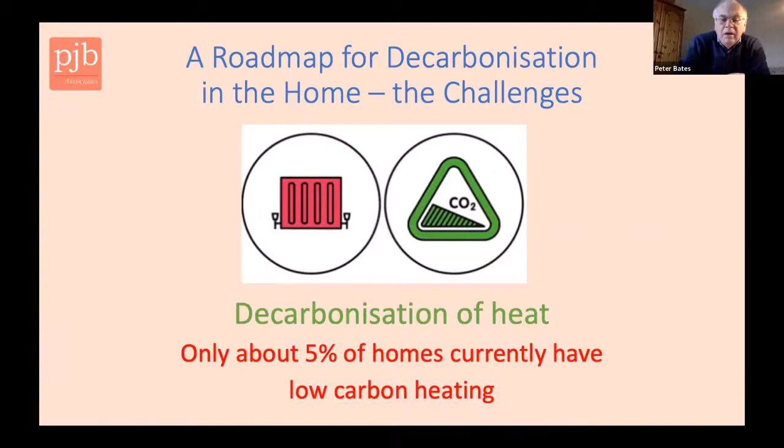So if I can introduce the topic of today, which is all about how we can decarbonise the home in terms of heating, because currently we only have about 5% of homes that actually have low carbon heating.

I've had a 30-year-old boiler and I want to decarbonise my home, and I still haven't as yet found the ideal solution to do that in my 3-bedroom semi-detached property, which some of you probably would have seen when I used it as a case study in previous events, which, by the way, have been recorded and are available on the Cleantech website.

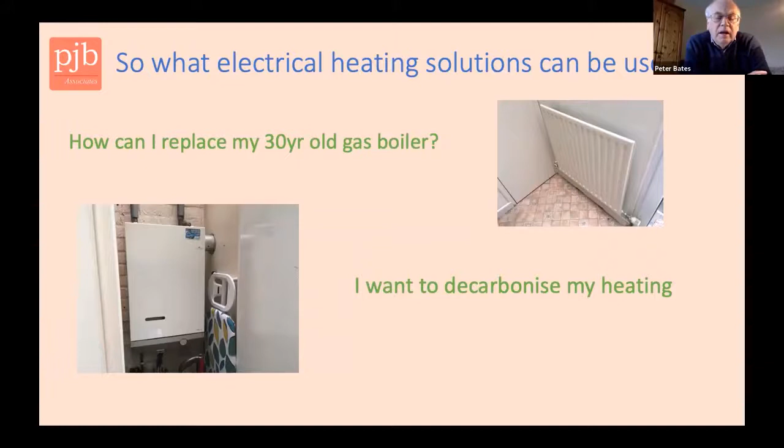We've still got something like 85% of heating through gas heating, particularly in the wintertime. And that's a big issue which does need to be addressed.

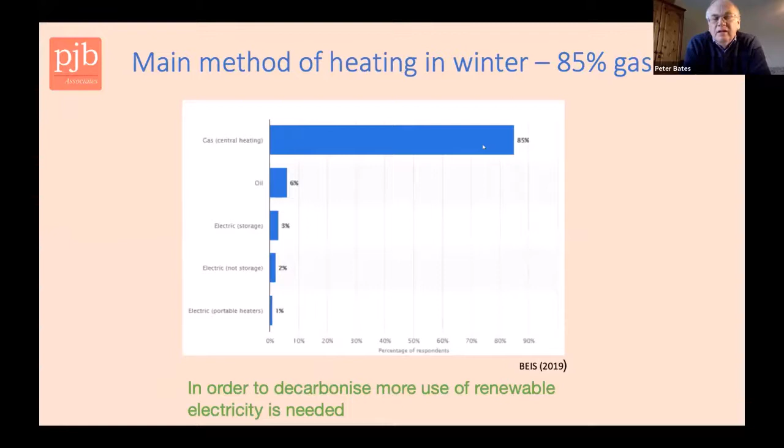We still have this problem of energy being wasted in homes for a whole variety of reasons. And it's pleasing to know that the PAS 2035 delivery mechanism is gradually addressing the whole issue of taking a whole house approach to improving properties, but dealing with fabric first.

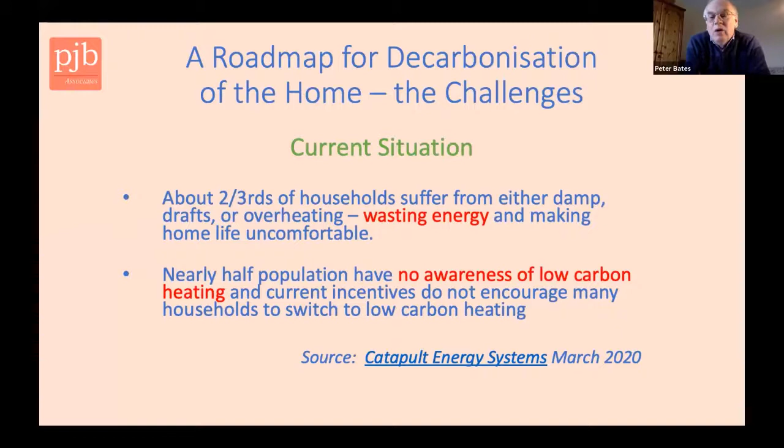Now, we're not going to be looking at fabric first in this session, because we want to be looking at what new innovative solutions are there to create low carbon heating solutions. And we must bear in mind that half the population don't have any awareness of low carbon heating in any respects.

The main solution currently appears to be air source heat pump, and possibly a ground source heat pump if you actually have the space. It's certainly something which has been encouraged by the government in terms of the Green Homes grant funding and the renewable heat incentive funding, the latter of which has been going for a few years now.

But I've been looking at this seriously for my own home. I'm not totally convinced it's appropriate for my own home, and for that matter, I don't think it's the only solution which is going to be needed in order to reach carbon zero by 2050. And there's a lot of issues around there.

It is claimed to be very efficient, which is a big advantage of air source heat pumps, but that efficiency does drop in winter when we most need the heating.

One of the other biggest problems is we actually have to have installers who are experts at getting this sized up correctly and trying to avoid it being oversized according to the occupancy needs. Although admittedly, I understand that occupancy needs do change over time.

And another issue I've discovered, going around a lot of houses doing energy assessments of people's properties, is that they need to be controlled correctly, as well as being complex to install. So air source heat pump is a very appropriate solution in certain contexts, but we do need other solutions.

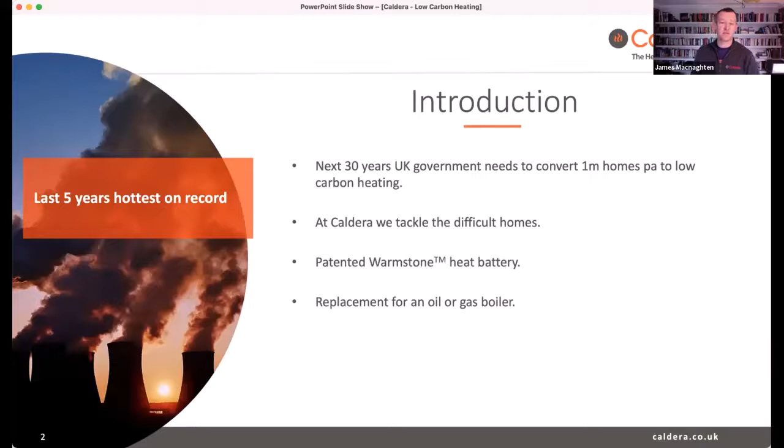The driver for this is that we've got to get to net zero by 2050. We have a particular focus in the short term on off-gas-grid homes, predominantly because we're more competitive against oil and LPG. As Peter said, gas is very hard to compete against at the moment, and until there's a significant shift in government policy, we're very much focused on homes using heating oil and LPG.

For those homes, the low carbon approach is predominantly heat pumps, and there aren't really many other options being pushed beyond heat pumps. These off-gas-grid homes are on average older, larger and less well insulated than homes on the gas grid. And this is the problem.

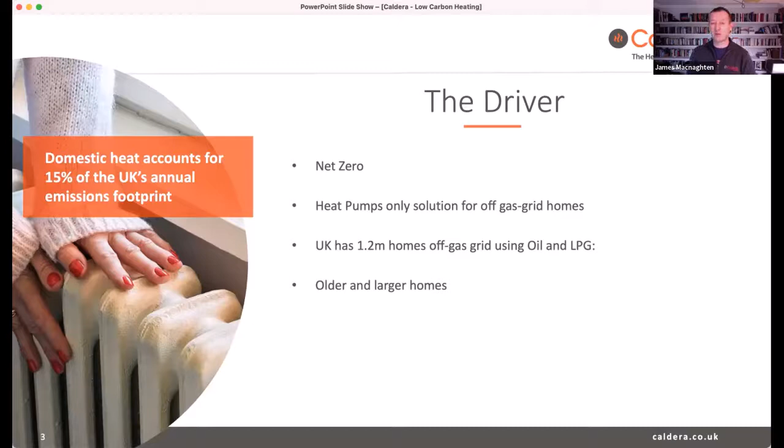Heat pumps work well in new, or I should say well-insulated, properties. When you look at making an older property suitable for a heat pump, depending on its age, you could be looking at a bill of between £20,000 and £40,000. This doesn't add particularly to the value of the property, it's deeply disruptive to the homeowner, and there often aren't any better alternatives.

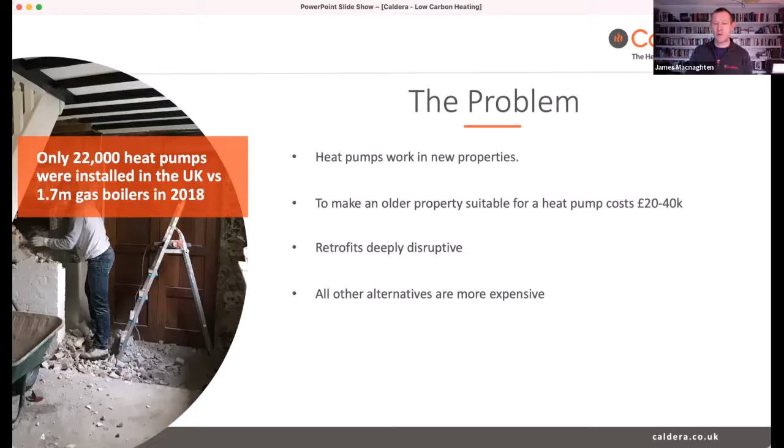So you end up with people simply replacing their existing boiler with another boiler, even though they really want to do something low carbon and green. This is part of the issue - we have very old housing stock in the UK.

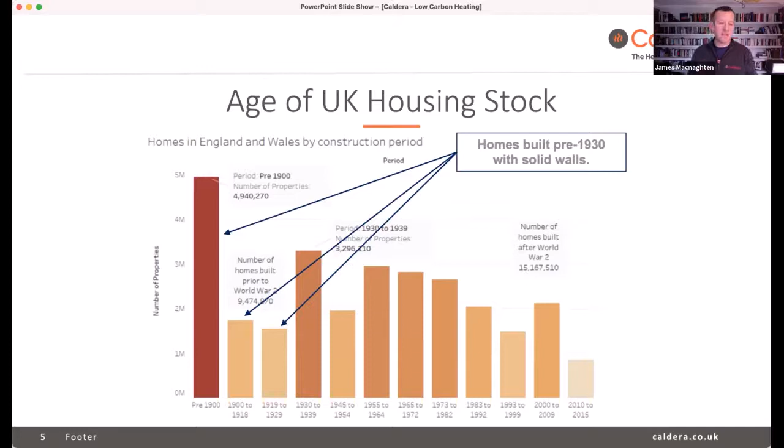So 7 million of our homes were built before 1930, and they all have solid brick walls. The ones after 1930 are better, but they're not great. And even today, and I feel quite strongly about it, I believe new build homes should be built to much nearer passive house standards than the current building regulations require. It's so much simpler to make a property well insulated when you build it than it is to do as a retrofit. And retrofits are really difficult.

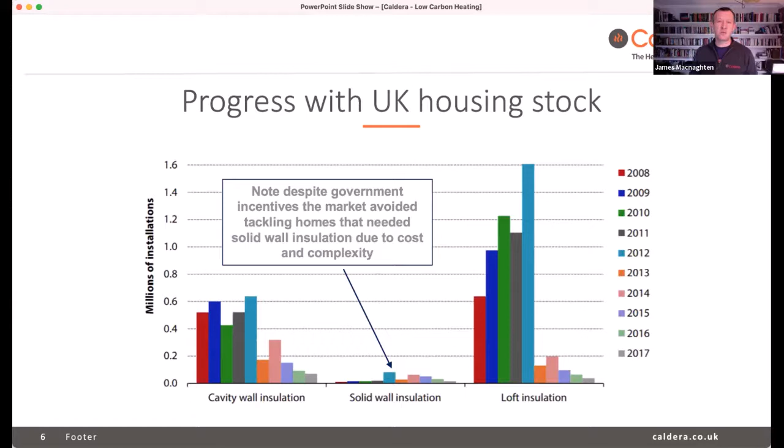So between 2008 and 2017, there were a lot of initiatives to improve the fabric of buildings. And you can see how everybody tackled the cavity wall insulation and the loft insulation, and all of the homes with solid walls got left alone because they're too difficult. And when you look at how far we've got, we actually tackled 70% of the properties with cavity walls. We've tackled 70% of the properties with loft insulation. We haven't even got to 10% with the 7 million homes that have got solid walls. So that's about a quarter of the housing stock. And it is much harder to treat for a number of reasons.

So when you look at solid wall insulation, you might have bought a home because it looks beautiful, because it's old. Well, you don't want to insulate externally, but then if you go internally, you potentially lose a lot of room space. And people often just keep going back to saying it doesn't make sense financially. We're aiming to help these sort of properties because our approach is we're after net zero carbon, we're not necessarily after low energy. Often those two points get conflated, but if somebody is using zero carbon energy and they're using more than a home next door that's also using zero carbon energy, we've still got to where we wanted to get to, which is net zero.

So this is our solution. We call it the zero carbon boiler. It uses our Warmstone heat battery, and I'm standing next to the unit that's heating my home at the moment. It stores 100 kilowatt hours of heat. That's about enough for a 4-bedroom home in winter for 24 hours. In the summer, it'll provide at least 7 days of hot water. That's partly to do with the efficiency, which I'll talk about in a bit. We're very keen that it has the same characteristics as your normal boiler. So this outputs at 30 kilowatts. And we've got a target installed cost of £10,000. If I was to do 100 kilowatt hours with lithium ion batteries, you'd have a bill of about £70,000.

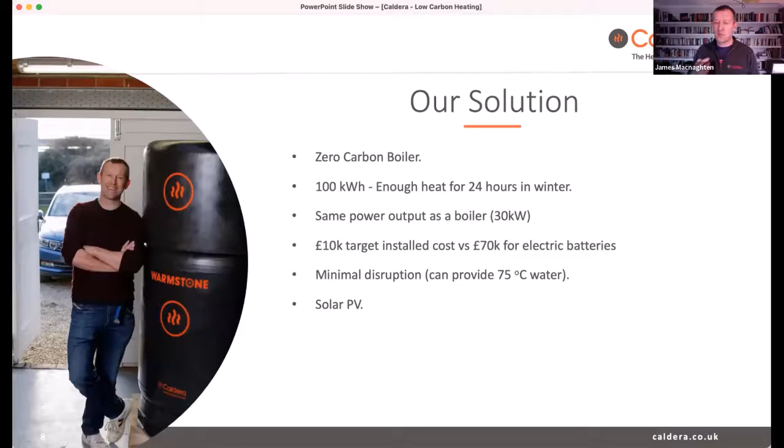The second point is minimal disruption. We use the same plumbing that your boiler uses. So if you need 75 degrees C water because it's an old property with small radiators, that's fine. We sort that out. So we're looking for minimal disruption to the homeowner. And lastly, if you've got solar PV, in the summer we can store excess, so you can use it for free hot water. If you go on holiday, we'll store it for a week. We can shift into weeks, as you'll see in a second.

There are 3 components to our product. We've got the Warmstone heat battery. It's about 1 metre in diameter, about 1.7 metres high. It's located outside the property or in a garage, has an electrical supply, and then in your home we replace the boiler with a heat interface unit, which comes from district heating networks. So it's a standard bit of kit, same functionality as a boiler. You shouldn't notice the difference.

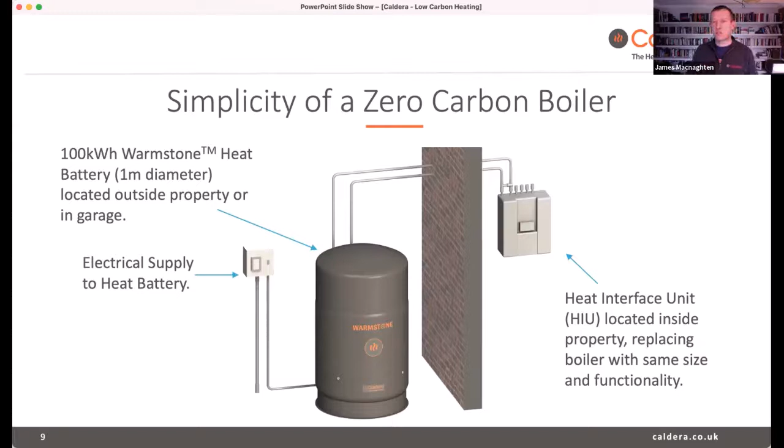So at Caldera, we've focused very hard on two things. One of them is efficiency and one of them is power. I've talked about the power earlier. I've tried heating my home on 15 kilowatts and it takes ages to heat up because I've got my hot water cylinder on and I've got the heating on, and it just takes a long time, and immediately you feel the difference. So power is important.

We've also done a lot of work around efficiency, and we use ultra efficient vacuum insulation, and at high temperatures we've had to spend a lot of time developing this because it's hard to make, and we now have a system where our average loss is around 220 watts. So for your home using 16,000 kilowatt hours a year for heating, it's going to be 90% efficient. You'll lose about 10% of that.

Couple of nice pictures taken with our thermal camera. There's me standing in front of the unit, the Warmstone core, which is inside. It weighs 1.3 tons and it's at 480 degrees C. It's a lot cooler than me.

That's probably not hard actually, but bad joke.

But there's my trusty tea mug. You see it in the picture here. But that was at 70 degrees. My face is a lot hotter. The outside of the vessel is at 6 degrees above the room temperature.

We operate the Warmstone core between 500 degrees Celsius and 200. And because we have a high temperature, it allows us to get lots of power out and it allows us to provide hot water. But to cool from 500 to 200 degrees C takes 19 days, almost 3 weeks. And I'm sure in time we will get over 3 weeks. So if you're away for a week, we'll store the solar energy. You hopefully come back to a nice full tank in the summer.

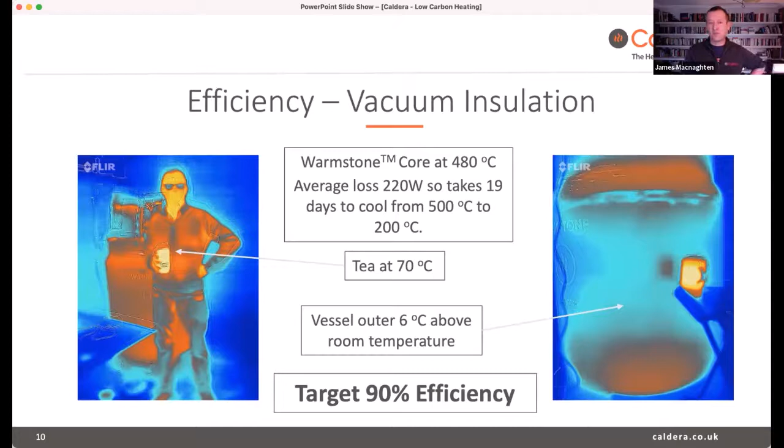So there are a number of things that heat batteries can do that are really important, and we see ourselves as complementary to heat pumps. For homes where you can use less energy because you can fit a heat pump, use a heat pump. There will be a range of properties though where, to my mind, they're not the right solution.

This was a picture produced by National Grid just showing the issues they were having managing low demand last summer, or it was actually around Easter. You can see the UK grid varies from about 15 in the summer to about 28 gigawatts. In the winter, it generally varies from about 30 to 50 gigawatts. If we installed 1 million of our units, we would give the grid 20 gigawatts of demand response for 5 hours. I couldn't get that on the scale here, so I've doubled the width, or we give you 10 gigawatts for 10 hours. And that's 5% of the housing stock with heat batteries.

And suddenly you can start to move demand around to when renewables are generating. It supports the grid because you have the ability to drop demand off or bring demand on, at will. But it also supports the rollout of renewables. If the electricity price goes to zero all the time, people will stop building renewables, or the cost of it to the government rises. So by actually being able to fill in the gaps around when heat pumps are working, which tend to be in the morning and the evening, we actually support the grid and we support the rollout of renewables.

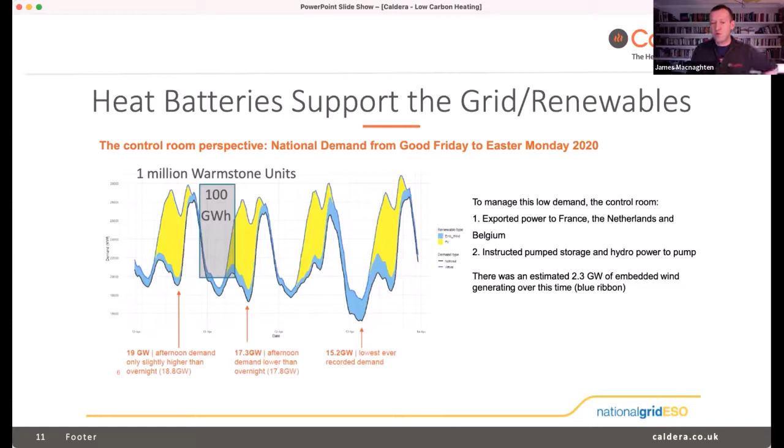So, I don't know what the right ratio is, but to me, there will be some ratio between thermal storage heat batteries, electric vehicles, which do the demand side response, and heat pumps that want to operate when people need their heating, which is predominantly in the morning and the evening. So we see ourselves as very complementary to moving the whole shift towards more wind generation and more solar.

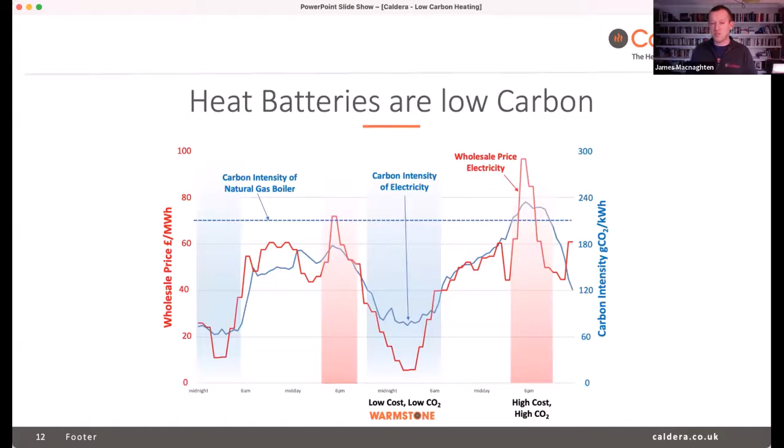There are a few regulation issues. I haven't had a chance to review the budget, so I'm afraid I may be missing things. We would like heat batteries to have equal grant status with heat pumps. So if you're going to subsidise heat pumps to go in, we would like a similar subsidy. If we don't get the subsidy, then in a sense, it's harder for us to compete.

In fact, it distorts competition. So the first thing we want from the government generally is equal technology status, rather than picking one technology and effectively making it harder for others to commercially succeed. That also goes for VAT status. Currently, heat batteries attract 20% VAT and heat pumps attract 5%.

And then within the electricity market and the electricity and gas market, there are two pricing structural issues. The first one people are aware of, and the reason we don't compete against gas at the moment, which is gas is effectively subsidised and electricity is effectively taxed. So there's a very big discrepancy between the two in terms of pricing.

And then there is a separate issue that is related to electricity only, which is that there's a lot of social charges to do with renewables that have been installed on the grid already. So CFDs, FITs, ROCs, that's added on at a fixed rate to each unit of electricity. And the network costs are also added on broadly at a fixed rate. And that makes no sense. If a wholesale price is zero and the grid is not loaded, you shouldn't be applying these charges as a flat rate. So we believe that you need to move to a much more flexible rate where these charges are also reflective of the wholesale price.

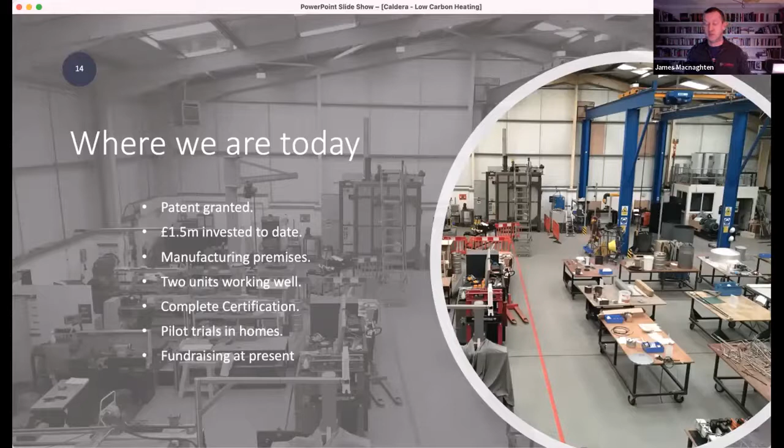Thanks a lot, James. I'm just putting my video up again. Yes, we have actually had quite a few questions come in. I think you did make a very relevant point about the balance between gas and electricity, and the fact that it's weighted in favour of gas at this present moment in time. So that was a very good point.

Couple of questions here from Matt Barr. How does vacuum insulation fare over years? It depends upon how you do it, but we are confident it will last the full 20 years.

Okay, good. And there's one from Nicola Terry about the Homely device. I don't know whether you've come across the Homely device. Homely? Homely, yeah. It's actually a device which you can put onto an air source heat pump. It's come from a company who are based in Manchester.

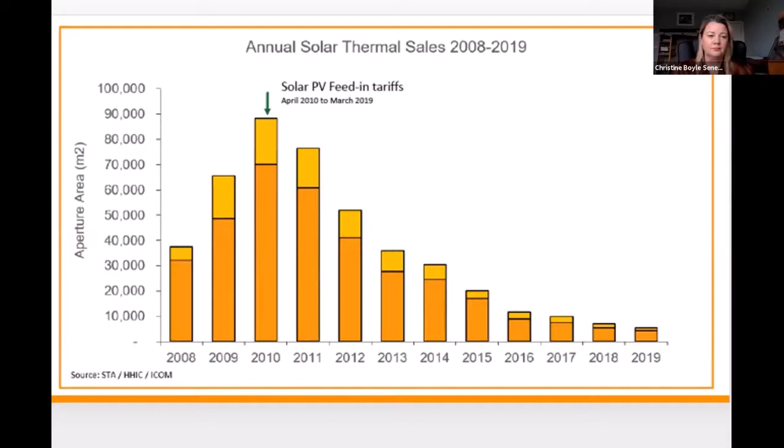Solar thermal did of course have the renewable heat incentive. However, solar thermal deployment under the renewable heating incentive has been restricted due to only being used for taps and baths, so we weren't able to use solar thermal for space heating. In terms of SAP 2012, which is the government standard assessment procedure for energy ratings of dwellings, the market for solar thermal was significantly limited.

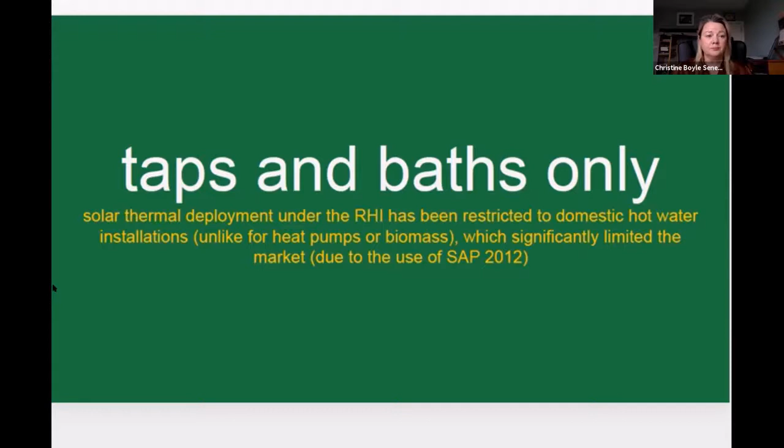Imagine if heat pumps could only be used to heat bathrooms and no other room. Or imagine if solar PV was only allowed to power your television and nothing else.

SAP 10.1 was then introduced in October 2019. This graph shows that under SAP 10.1, if we increase the solar thermal collector space from 3 square meters to 10 square meters, we can improve the energy efficiency performance rating from 3 up to 7.

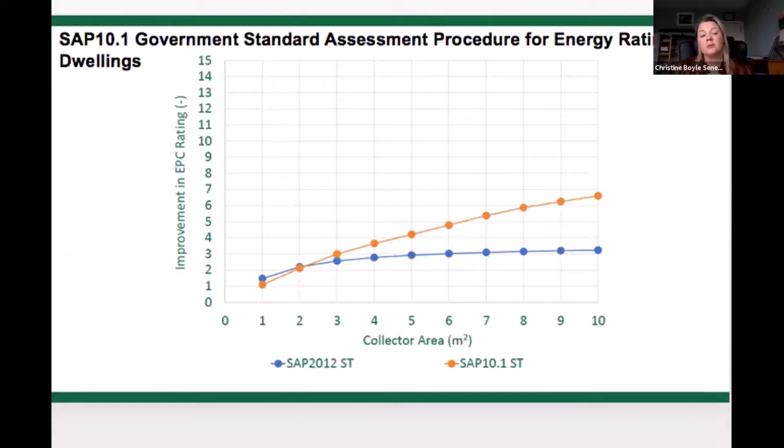Cheap gas prices haven't helped either. In the UK, gas prices are relatively low, and this encourages the use of gas as the main fuel for heating. The UK has one of the biggest fossil fuel subsidies, resulting in low gas prices, half the price of, say, Spain, Italy, or France, and this does not incentivise the shift to renewable heating options.

But the solar thermal industry have engaged with the game, and they've attempted to change the instructions and information we use to understand solar thermal.

SAP 10.1 now includes solar thermal for space heating and uses more realistic carbon emission factors, which gives solar thermal a benefit. We now understand that heat pumps work well with solar thermal and PV. And a gas levy will of course ensure more rational gas prices and level the playing field.

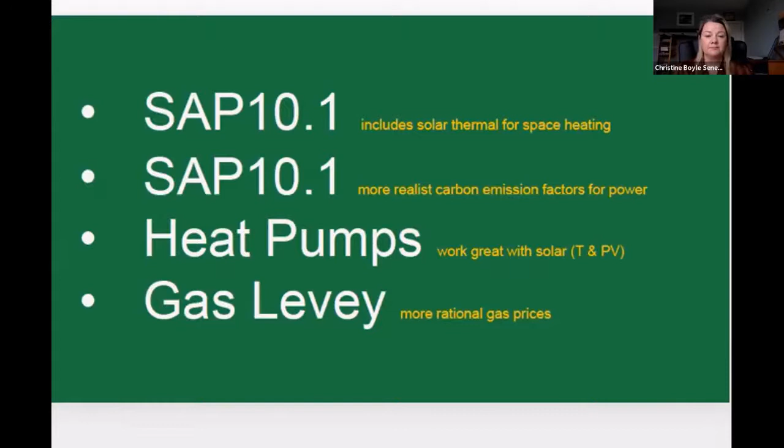But more work needs to be done in terms of schemes to drive the adoption of low carbon heating. Government is beginning to understand that schemes like the Green Homes Grant must work for consumers, installers and manufacturers within the entire supply chain to deliver solar heating into our homes and workplaces.

More work needs to be done in terms of schemes to drive the adoption of low carbon heating. Government is beginning to understand that these schemes, like the Green Homes Grant, will deliver.

Additionally, as manufacturers, trainers and installers of new heating solutions, we have a responsibility to stop focusing on flashy brochures and to focus our energy on locking in quality standards within the entire solar thermal supply chain.

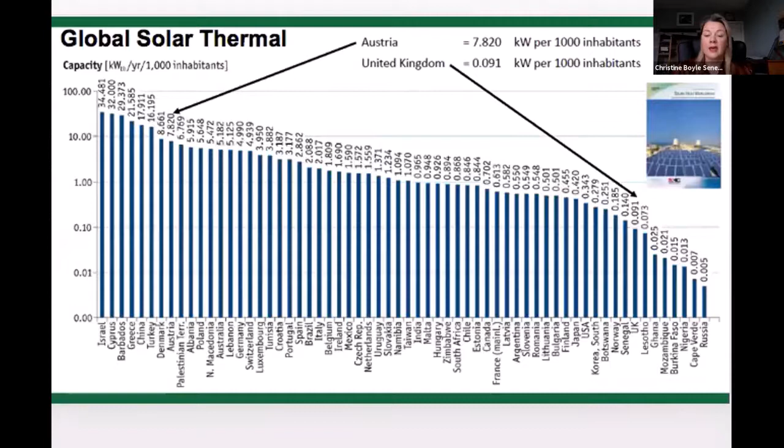If countries like Austria have recognised the value of adopting solar thermal to reduce carbon emissions on this scale, so can the UK. In Denmark, they've proved that with scale and seasonal storage, they've reduced the cost of solar heat to between 2 and 5 cents per kilowatt hour, proving that we can compete on price and we most certainly can compete on carbon.

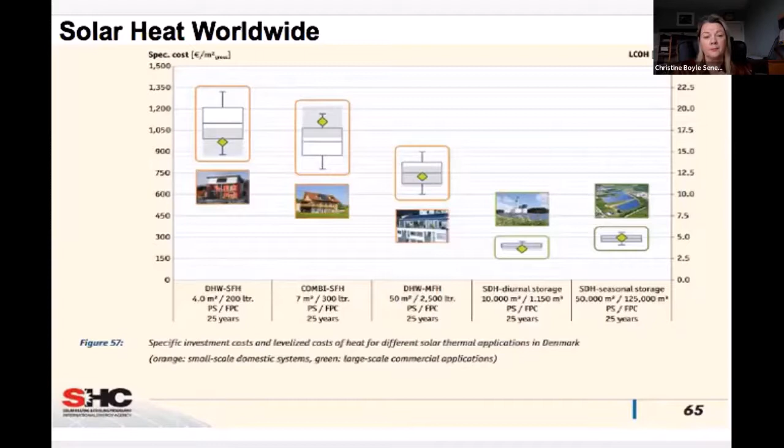For those of you waiting for the answer, we were going to do a survey to ask what you thought was the percentage of energy used for heating in our homes and workplaces. The answer is 78% of the energy in our homes and workplaces goes to hot water heating, space heating and cooling. Solar thermal is one of the most efficient heating technologies.

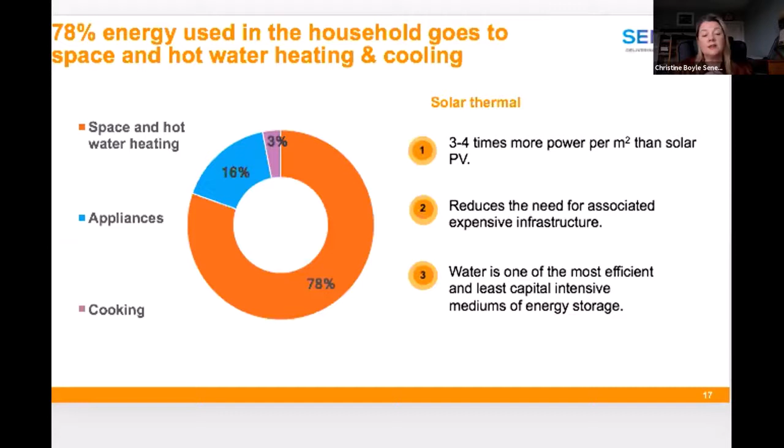It produces 3 to 4 times more power per square metre than PV does. Solar thermal is generated on-site, off-grid, reducing the need for expensive infrastructure. And water is one of the most efficient and least capital-intensive mediums of energy storage.

However, the current technology behind solar thermal has limited its widespread adoption and its contribution to decarbonisation. Current thermal panels are made of glass, copper and aluminium, carbon-intensive materials that make them expensive to manufacture. They're heavy and bulky, which makes them expensive to install. They're not architecturally attractive.

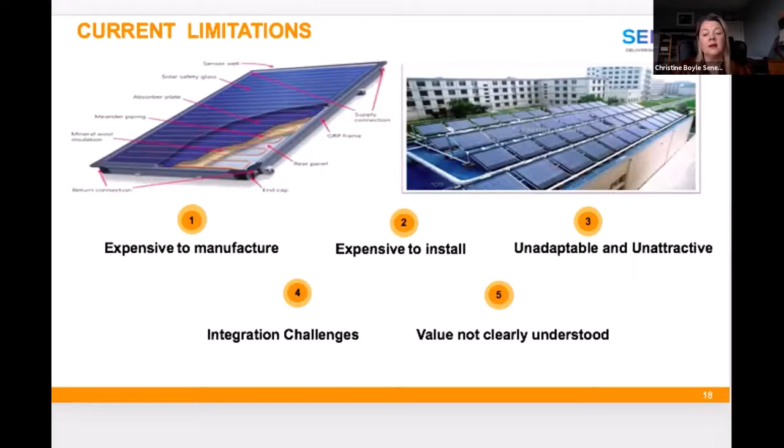There have been challenges integrating them with both the building envelope and other renewable technologies, such as heat pumps. And the value of this technology to the customer is not clearly understood. For all of these reasons, solar thermal has mostly been used just to provide renewable hot water and not to deliver space heating and cooling, which is where we see the big opportunity.

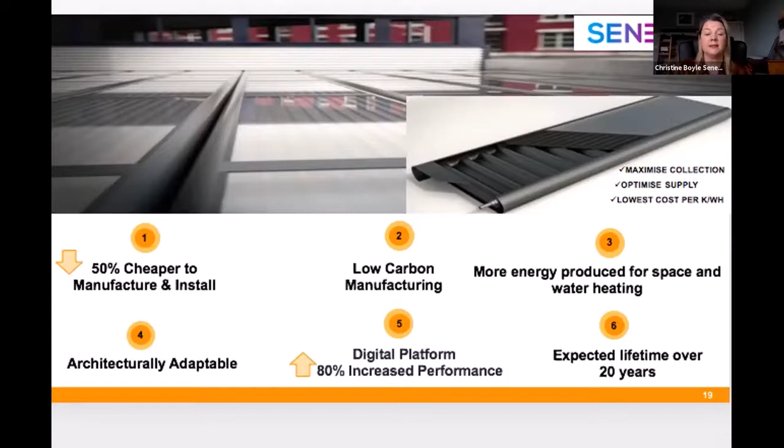This enables us to feed this energy into not just hot water, but also space heating. They give architects much more flexibility with design, and we have a user-friendly digital platform which drives increased performance, lowering the cost of delivering a kilowatt hour of solar heat to a price point that will compete with gas and oil. In comparison to other solar panels in the market, Senergy provides the lowest cost, lowest carbon solar heat energy.

So currently we're really working with our early customers, and we're focusing on locking in our entire supply chain. We see this is absolutely crucial, beginning with the material suppliers, through to our polymer manufacturers of our panels, through to the heating system partners that we partner with in terms of delivering the systems, through to accredited trainers that will bring about our accredited installers, ensuring that we deliver the same high standard installations that will keep our pilot customers happy. It's crucial that we create a highly skilled workforce at every stage of the supply chain, because this is the foundation required if we deliver and maintain the low carbon heating solutions of the future.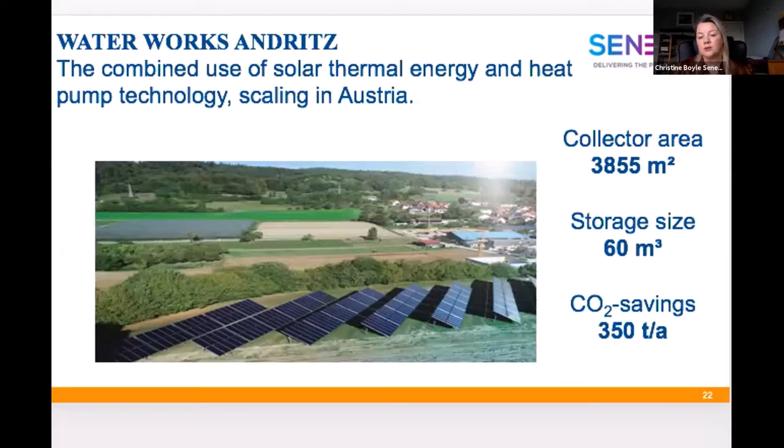And this is the prize. This is the result when we deploy large scale solar thermal with large scale storage. We get greater cost savings, and you can see greater carbon savings. Another example of solar thermal used at this time for cooling, and these projects highlight the opportunity we have, particularly in areas where land is not available or extremely expensive, particularly in urban areas, where roof space becomes valuable.

I hope I've outlined the opportunity for solar thermal to enable us to build back better over the next decade, and I'm really happy to take any questions later. Thank you.

Thanks a lot, Christine. We've actually got quite a bit of time left now, which is great. You raised an important point, and I don't know whether you're actually able to find any way forward in this. In fact, under the renewable heat incentive, currently your solution is not eligible for that. Are you seeing any potential kind of movement from government in making your solution available under the renewable heat incentive, or the revised version of the renewable heat incentive from April 2022?

We are to date funded by BEIS, so obviously they're keeping an eye on exactly what we're doing, and we're feeding into the decision makers in terms of policy going forward. So we'd like to see that when they see the innovation coming forward, they align the policy going forward to that, particularly if they want these technologies to be taken up and scaled. I think the important thing is that within domestic use, renewable heat incentive is still optimal for our technology. When it comes to more industrial use, there has to be more consideration to the solar thermal technology and policy alignment with industrial use.

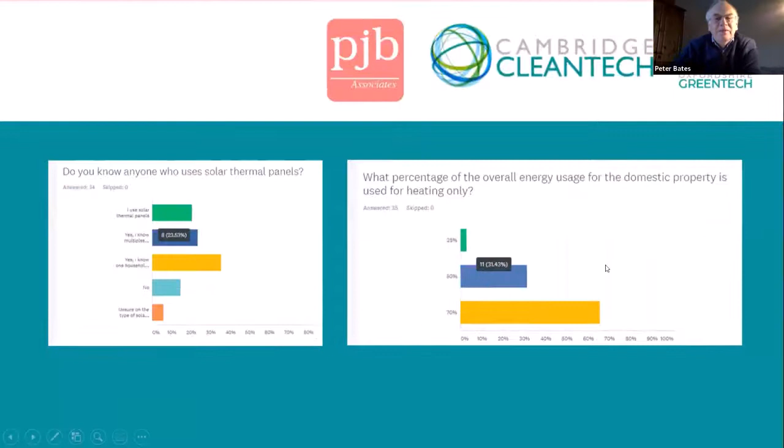Okay, here are the results from the questionnaire we had earlier. Can you just read out what the results are? Because to be honest, I can't see too easily on my screen.

The first question was, what percentage of the overall energy usage for the domestic property is used for heating only? Almost 70% of the attendees replied 70%, then a little less replied 50%, and only a couple of people replied that 25% of the overall energy was used for heating.

Christine, do you want to comment on that one? It's a very informed audience, is what I would say. Most people are aware that a very large percentage of our energy bills goes on hot water and heating, and obviously that's where our real challenge lies.

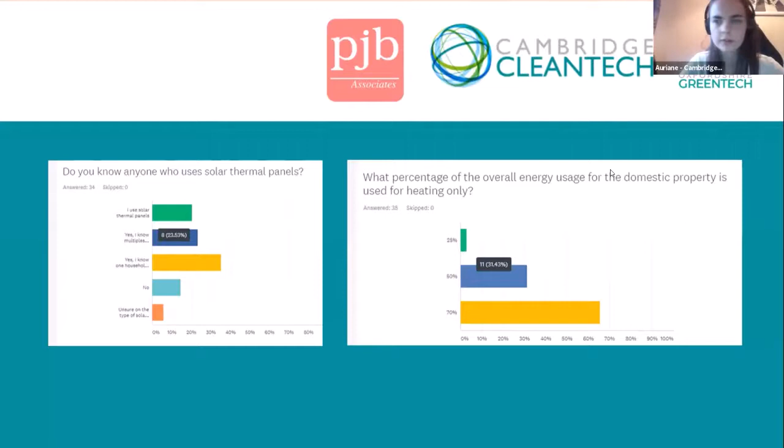The second question was, do you know anyone who uses solar thermal panels? It looks like the first three answers were basically, yes, I use it, or I know one or multiple people who use it. So it looks like again the vast majority of attendees either know someone or have solar thermal panels.

And that's really good to know. Again, I know this is an audience who are very much swayed towards renewable technologies and have been using them, and it probably isn't a snapshot of the rest of the population, unfortunately, but it's great to see that people do have solar thermal on their agenda.

I just got another question coming in. There's a few questions I haven't actually included yet, and we'll use those in the question and answers, but one's just coming from Alex Marshall: how does the efficiency compare between solar PV and solar thermal?

I wish I had a slide to show you the exact proof of that, Peter, but that's something we're doing over the next 6 months with our demonstrator pilots. We really want to prove it. From our simulation and modelling, we think we should prove that on-site, off-grid, taking the pressure off the electricity grid, a thermal option will be a much better solution. But in different cases, different horses for different courses. In some instances PV and battery will win out. But we very much want to give a proof point, so I'm hoping if I come back here in 6 months I'll be able to show you a slide that actually proves solar thermal and storage works on both cost and carbon.

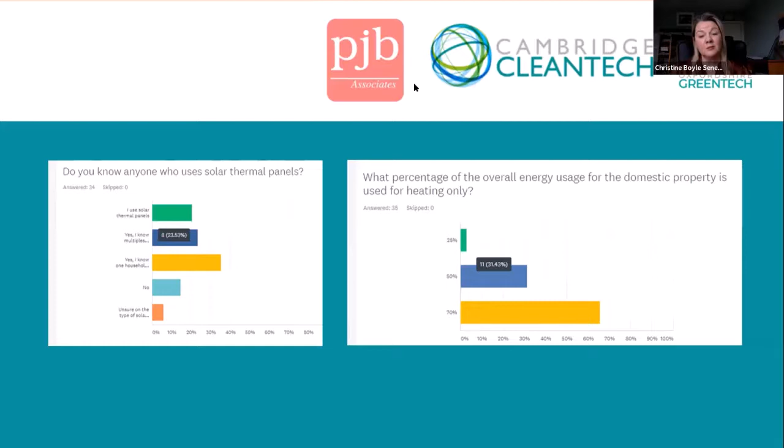Yes, I think that's an important point. I've had solar thermal in its original format for about 18 years now, and I can certainly say for my own house, a 3-bedroom semi-detached house, for roughly 6 months of the year I don't need to put on my gas boiler to heat up my hot water. There's the occasional day or a few days when it gets quite touch and go, but for roughly 6 months a year I don't need it. For another couple of months either side of the summer season, I'm probably only putting it on for half an hour just to top up my solar thermal.

So as a technology, I think it's certainly an underappreciated technology in many respects. Good luck with your experiments and proof of concept over the next 6 months or so in that respect.

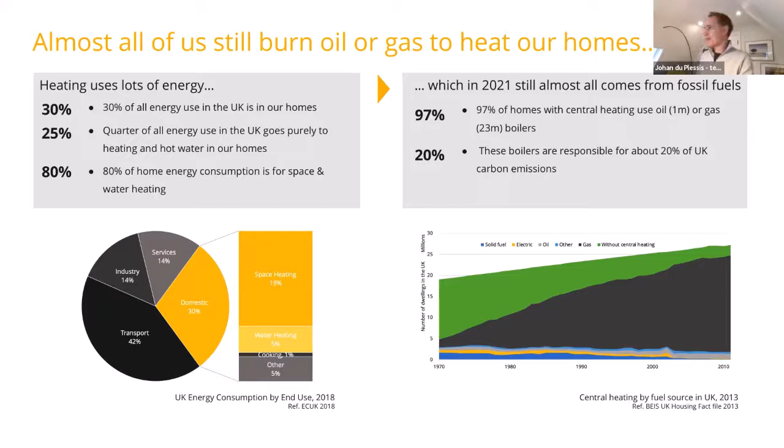The challenge is most of it's coming from fossil fuels still. But the question I need to ask you is, how are you going to heat your home? Peter touched on this earlier. Peter, how are you going to heat your home when boilers are banned, and how are you going to get away from a gas boiler? We need to stop using fossil fuel boilers. That's clear. And increasingly, the option is electrification, and everything is pointing to electrification.

Thankfully, the carbon intensity of the grid has dropped by 50% just in the last 8 years or so. But I'm sorry to say that was the easy bit, and we barely noticed it. Actually, the really, really hard bit is going to be getting to net zero.

And from a heating perspective, that's for two key reasons. Firstly, there are really massive challenges to managing an ultra low carbon intensity grid as we electrify everything and more things are using power. And secondly, because we've seen over the last number of years, heat pump sales are flat, and that's despite a pretty aggressive subsidy. Now, I've got nothing against heat pumps. I think they're a brilliant technology, but they are best used in the right place in the right circumstances. And they will not be suitable, I'm telling you, they will not be suitable for all homes in this country, and we need to have another solution.

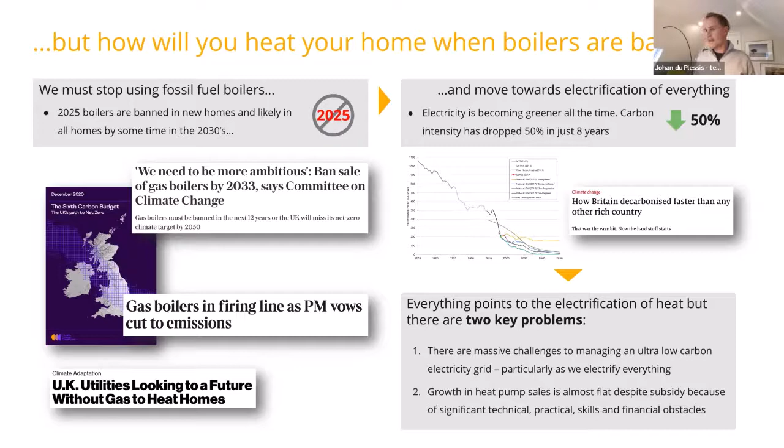I'm going to talk a little bit about, because I thought this audience might appreciate a little bit more than the average audience, but hopefully I'm not wrong, the 4 key challenges that I see around the zero carbon grid. We've spoken a little bit about volume today. So the volume of energy that we need from heating is obviously massive, and to convert all of that from fossil fuels to electricity, the quantity of electricity is quite high. That we know. But there are 3 other really, really critical issues that are actually arguably more challenging, because you can build more and more wind turbines and solar plants.

But actually the real challenge is around flexibility, so we've spoken a bit about that. System stability and inertia - this shows one of the turbines up at Drax, but really the inertia that these really large centralized generators give to the grid is really valuable. And in a world where we don't have that, we need to provide that in some other way. Otherwise we get really big distortions at a very short period of time.

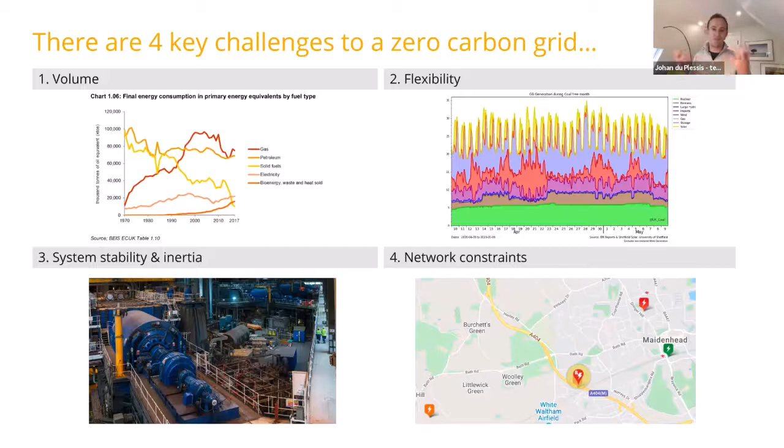And the fourth issue is around network constraints. This is just a screenshot around our office in Maidenhead, and I think 3 of the 4 transformers are heavily constrained. That means that effectively the copper and the transformers are limiting our ability to get more power through the pipes, in simple terms. So we've developed a zero emission boiler, ZEB, and we actually think this is going to be the simplest and cheapest way for people to stop burning fossil fuels. And most importantly, it supports some of these challenges that I've just been talking about.

So a ZEB is a plug and play boiler replacement. It connects to your existing heating system. You take out your boiler, you put this in its place on the floor, somewhere else in your home, wherever you want, and it connects into the existing heating pipes. So the same copper, we connect it up to the fuse board, and it combines direct electric heating with ultra high density dry core thermal storage, about 40 kilowatt hours of usable thermal storage.

And what we're able to then do is to flexibly control this storage capacity to optimize for any number of data inputs, like real-time carbon intensity of the grid, flexible pricing like the Octopus Agile tariff, for example. We're able to support self-consumption of local renewables and PV, and we can also provide these really short-term frequency response services. Each ZEB has its own onboard revenue grade metering and frequency monitoring, and it can respond in literally a 10th of a second.

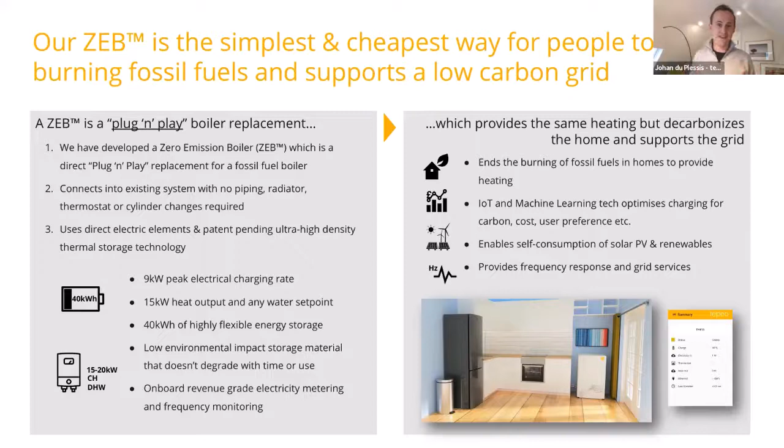So what happens inside a ZEB's brain? Well, as I've touched on, every ZEB connects to the internet over our IoT infrastructure, and we receive real-time telemetry about the performance of every component on the ZEB, how it's performing. And then we use machine learning to actually develop a demand forecast for your home. Each individual home is different, as we know, but the machine learning algorithm will pick up the heating demand over time and build a really accurate forecast for when you're going to need heating, and build that into this algorithm of when we should be charging the ZEB.

So on the right there, you can see this is an example of a 3-day period. I think this was towards the end of December of a ZEB actually in a house. And you can see there how the state of charge of the ZEB is fluctuating over a 3-day period. And the heating consumption is there in blue. And actually this particular ZEB was on the Agile tariff. So Octopus actually paid the customer on the 2nd day of this period. But we were actually able to get a net negative price for this customer on this day because of this flexibility.

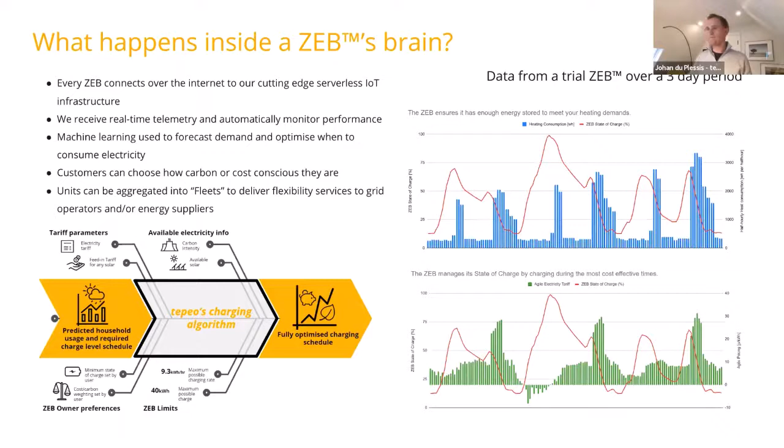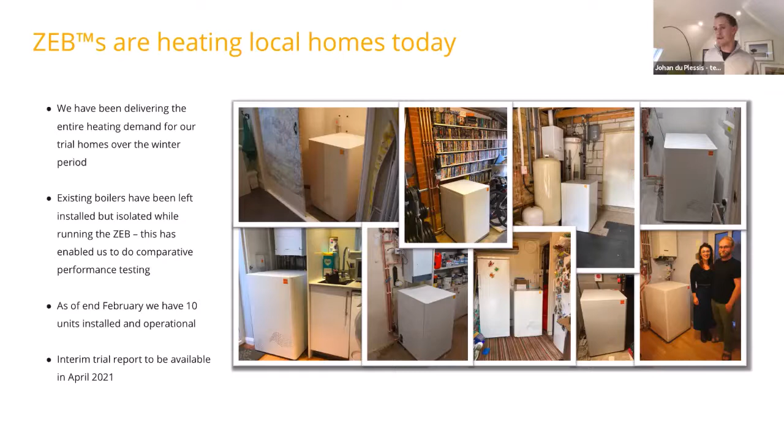So these ZEBs are actually heating homes. I think there are actually 9 photos here, but we've got 10 as of today that have been heating homes throughout the winter period. We've left the existing boilers in place for our performance trial, and they're valved off. We put them on for a week or so at a time to get relative performance data between the gas boiler and the ZEB. And there'll be an interim trial report in the next couple of months.

So I want to explain a little bit about why I really think a ZEB is a win-win-win situation for us. In terms of cost and convenience, I've touched on it. Easy installation. One of the biggest challenges to getting to high penetration of things like heat pumps is the skills base, retraining of existing installers to understand how to install heat pumps. We have none of that. We've installed it using existing heating engineers with no more than a very simple installation manual.

There are no radiator, thermostat or cylinder changes required, so you keep exactly the same radiators. It talks to the same thermostat, so over OpenTherm if you have that as well, and to your existing hot water cylinder. It's about 50% cheaper than a heat pump up front. And actually our modelling is showing that we can reduce the running costs to about 20% less than a heat pump, and that's because of the flexibility that we have.

And the other thing is this is a product which is particularly suited towards smaller homes, flats, 2-3 bed houses where often there isn't the space to put a heat pump. And this is one of the big challenges that we have. And lastly, there's no annual gas safe certificate, which is obvious but important.

In terms of carbon, there are obviously no local emissions because we're not burning anything. But actually, the indirect emissions are significantly lower than even a heat pump, potentially, because we are able to optimize for the carbon intensity of the grid. We can self-consume renewables, and we've done an independent analysis to validate the carbon savings of the product.

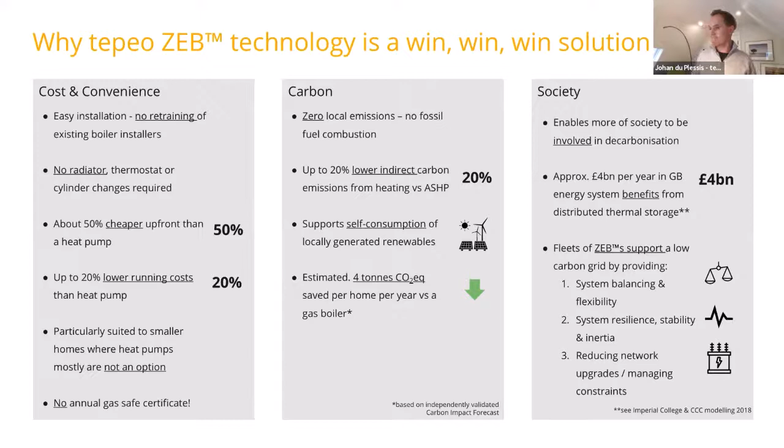Look, it's a huge market. There are 1.8 million gas and oil boilers sold every year in the UK. They need to be something else as quickly as possible. We're working with energy suppliers, we're working with Octopus, with OVO, with EDF, to help bring this to customers. We think that it's an ideal route to market because ultimately energy suppliers are best placed to leverage some of this flexibility, and we can help things like supporting their short-term trading positions and that sort of thing.

And then in terms of the proposition, we've spoken about the one-off cost, which is about half of a heat pump, so about £5,000, and then a subscription fee, priced basically at the same price as British Gas boiler cover, but will cover all your monthly maintenance, but also all the optimization stuff we do, and a whole load of other really cool insights and services that we are able to bring to customers, which we will be talking about over the next few months.

Bit about the team, but you've seen me, and we have raised about 1.65 million to date. We've just started another fundraise, which will be closing in June, and we've been working with various different parties, but yeah, there's a long road ahead, and we're hoping to launch the first products at the end of this year. I think that's what I was going to say for now.